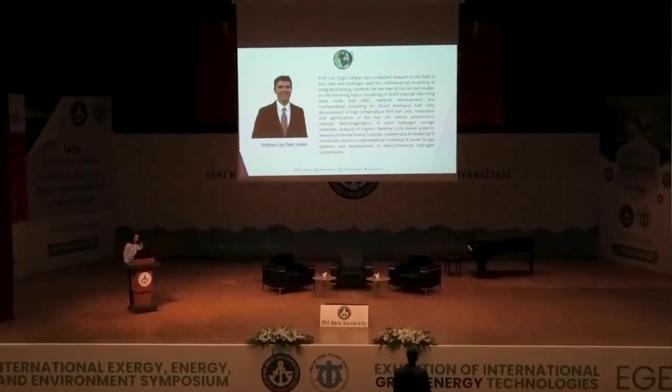Professor Çolpan's contributions extend to simulation and optimization of fuel cell vehicle powertrains, catalytic dehydrogenation of solid hydrogen storage materials, analysis of organic Rankine cycle-based systems, and the exploration of biofuel turbojets. Additionally, his expertise branches into diverse realms, including the mathematical modeling of membrane reactors, power-to-gas systems, and innovative development of electrochemical hydrogen compressors.

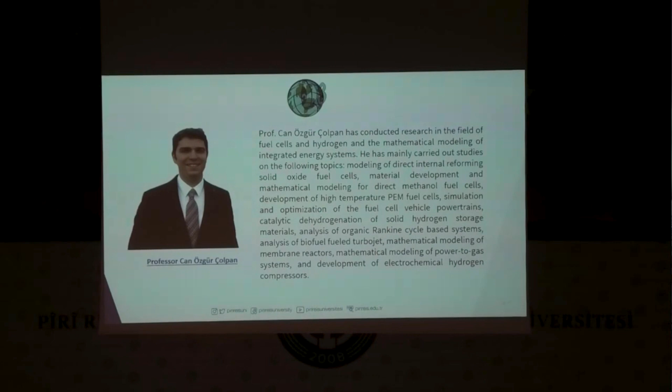With such a rich and varied portfolio, Professor Can Çolpan stands as a visionary in advancing critical phases of energy and fuel systems. Let's extend a warm welcome as Professor Çolpan joins us on the stage to guide and introduce our next set of insightful talks.

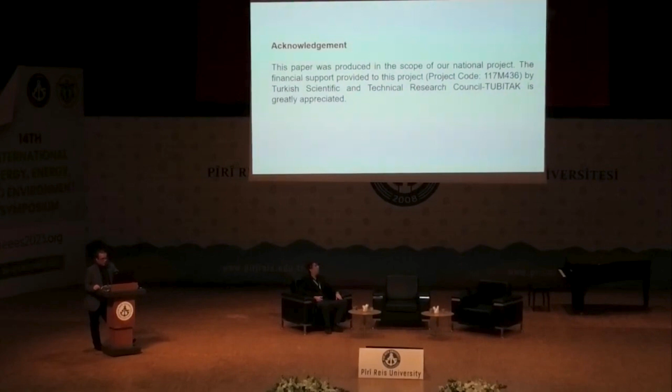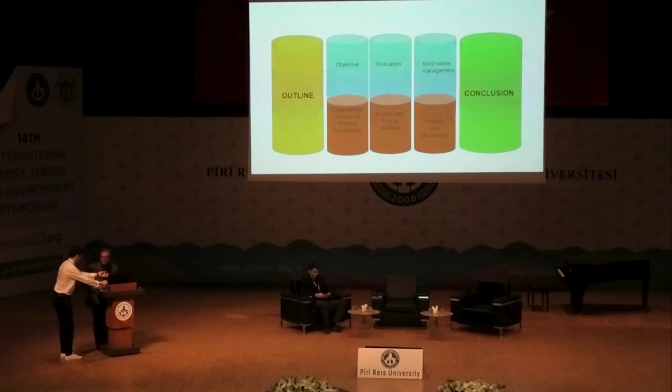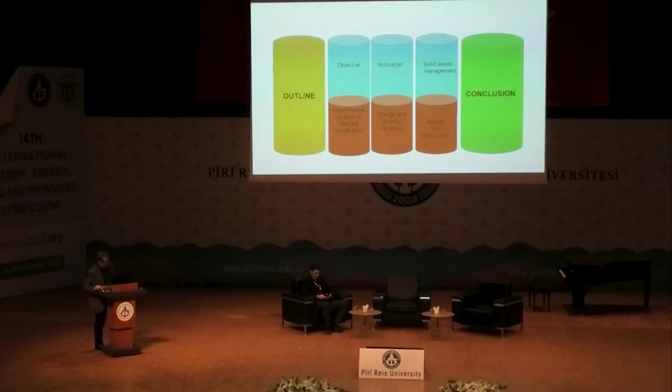The content: motivation, solid waste management, and conclusion. Meanwhile, I will mention the experimental system of plasma gasification, and I will explain how we can perform the exergy and energy analysis of the plasma gasification system. We will talk about some results, discuss what we obtained, and then I will share the conclusion with you. Okay, what is the main objective of this presentation?

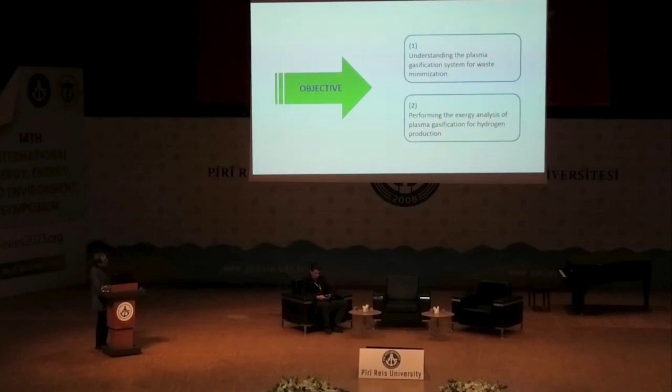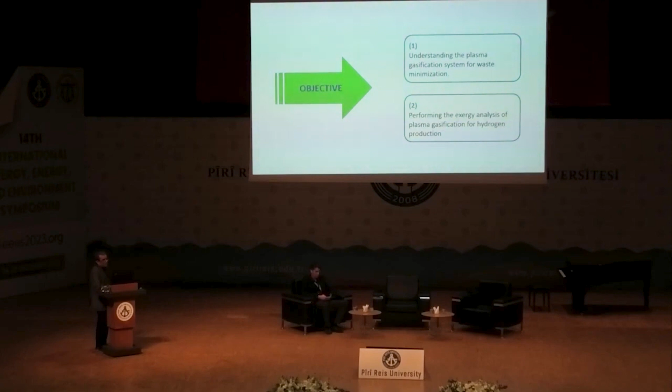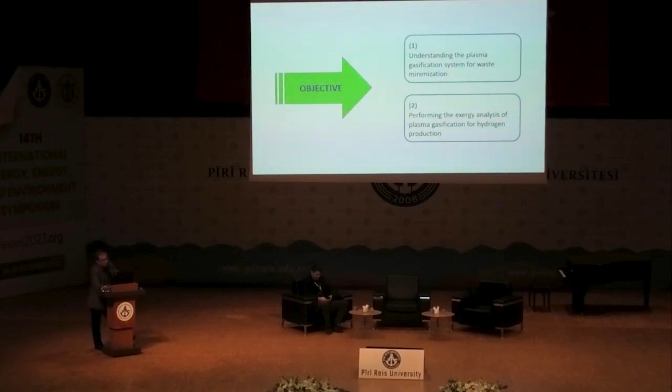First, we will try to understand the plasma gasification system for waste minimization. This is a very new technology, and I will give some details about the processes and the technologies of plasma gasification. And also, when we perform the experimental work and obtain some results, how we can perform the exergy analysis of the process. It is really important for researchers dealing with gasification technology or pyrolysis technology.

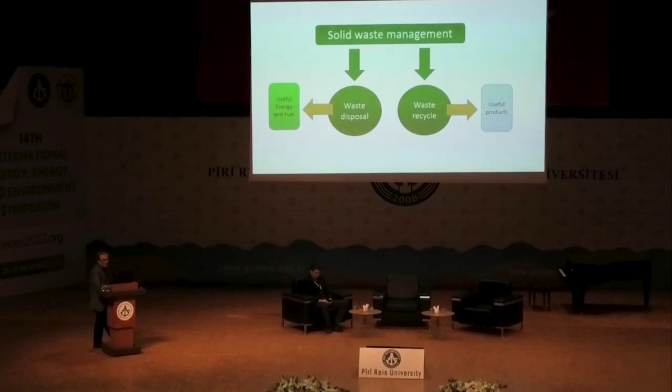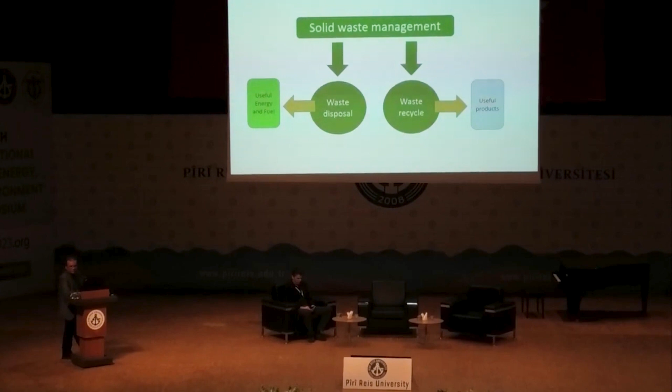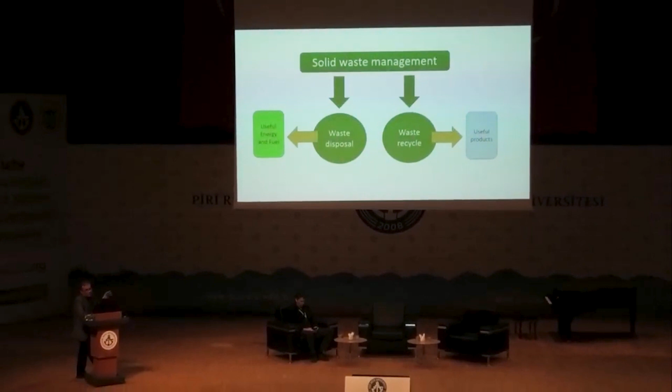As a motivation, I will talk about waste management. What kind of wastes do we have in daily life? We have many wastes. Some of them can be disposed of, some of them can be recycled. If you recycle the waste, you can produce some useful products. For example, you have paper as a waste, you can convert it into useful products by recycling. On the other hand, we have some harmful wastes. We have to convert these harmful wastes into useful energy or useful fuel.

What kind of recyclable wastes do we have? As you see here, we have metal. You can recycle it and obtain some new products. If you have paper as waste, again you can recycle it and obtain some new or different products. Glass, plastics, organic waste, batteries, light bulbs, and electronic waste are recyclable waste, and you can use all these wastes for obtaining new products for daily utilization.

On the other hand, we have unrecyclable wastes. As you see here, in 2020 we had COVID-19, and we produced much waste, some of which can be called pandemic waste. Pandemic waste is very harmful, and you can use plasma gasification technology, which is a high temperature gasification technology, for disposing of this pandemic waste. We have medical waste as well, and you can directly use plasma gasification technology for reducing the harmful effects of medical waste, or directly convert it into useful energy.

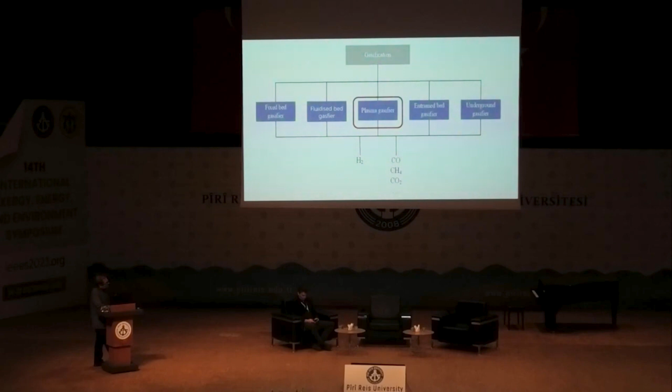And we have entrained bed gasification and underground gasification processes. And here we have to concentrate on the plasma gasification process. By using all these technologies, we can produce hydrogen-rich gas, syngas, and you can separate the hydrogen from the syngas and use the hydrogen for the applications. Okay, let's look at the plasma gasification system, which is the main focus of the project.

At that time, we will produce many wastes as well, and we have to develop other technologies because of the low temperature gasification process. Therefore, we have to add an arc plasma torch to the system. The arc plasma torch requires the arc plasma power source, and the plasma power source requires some amount of electricity from the network.

Therefore, we have to provide renewable energy. If you have solar energy or wind energy, you can use green electricity for the plasma power source as well. And if we use this municipal solid waste, we need some gasifying agents. In our project, we use vapor and some other gasifying agents.

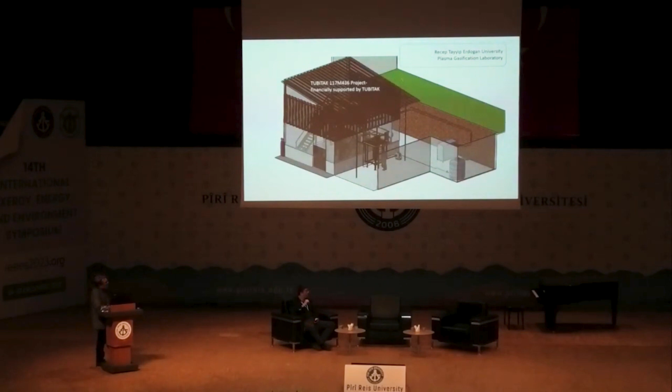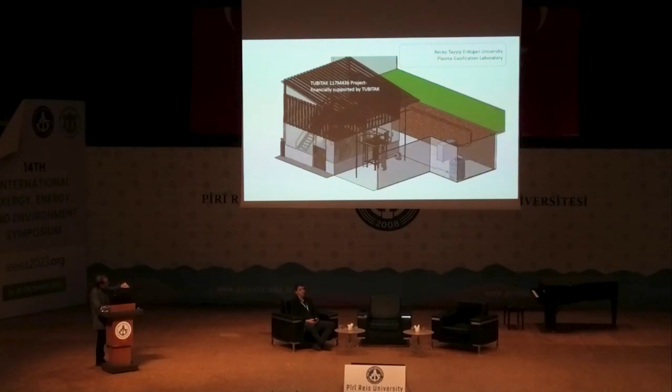Okay. Focusing on this schematic illustration, we developed a solid model of the laboratory. This is the plasma gasification laboratory, established at Recep Tayyip Erdoğan University in Rize, Turkey. As you see here, we installed this laboratory. All equipment required for the processes is there, and this area is optimized for the gasification technology.